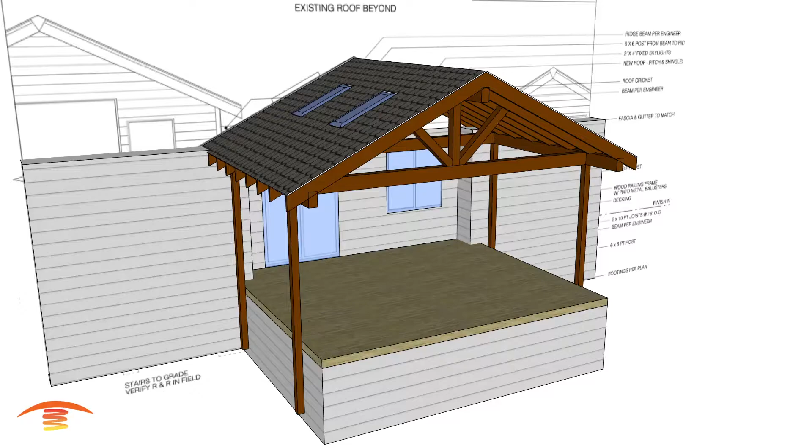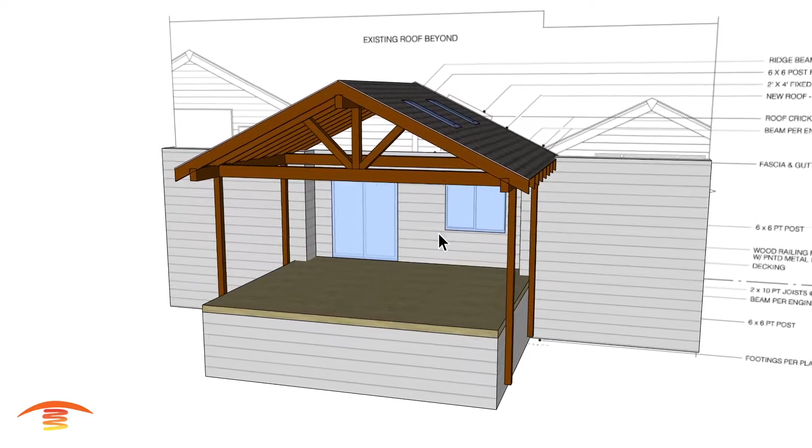Now let's get heating. Alright, here's a residential application. You can see it's a structure outdoors here on a porch. We have a door here that slides open left and right, a window. And we do have a couple of beams here coming across, and I think that's about it.

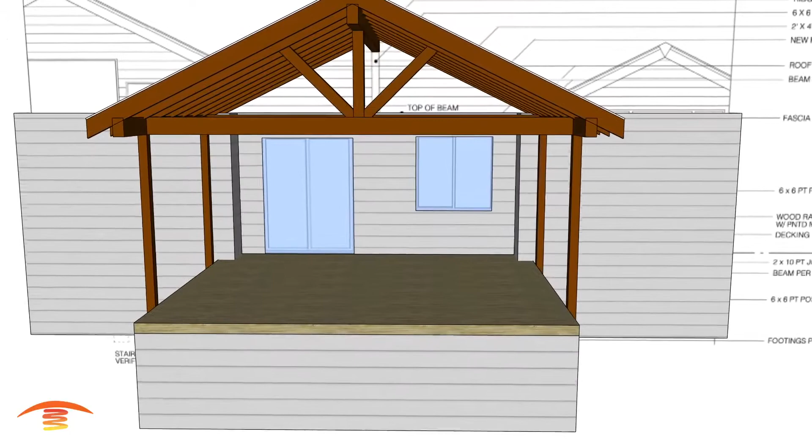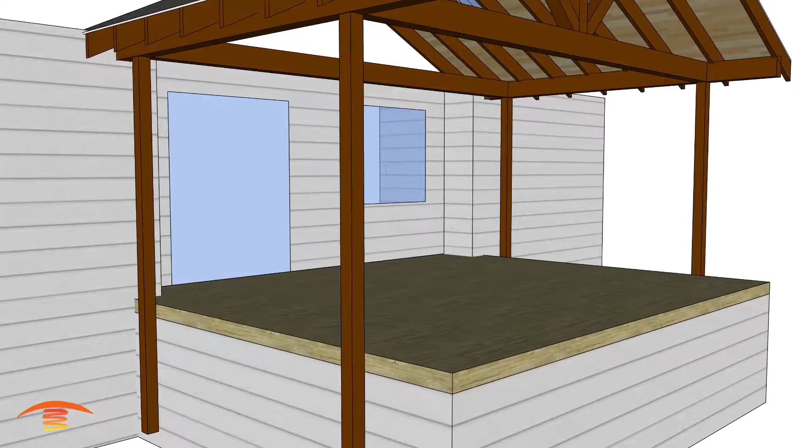You can see I received the floor plan as well as an elevation, and I think I also got a reflected ceiling plan. But in any case, that's all we have up here right now. I'm going to turn off the floor plan here, or the elevation. I didn't do the whole detail of the home here, but we're going to go ahead and just look at what we can do for this portion anyway. So let's go ahead and look at the overall dimensions.

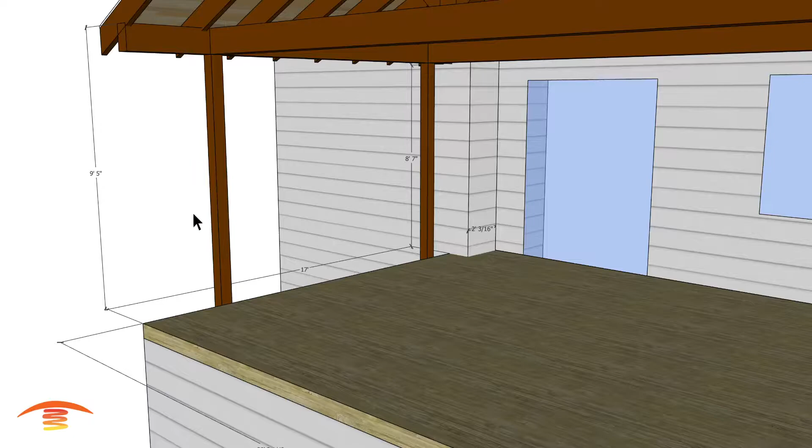Overall dimensions I have at 17 feet deep, I think. Actually, it goes a little bit further here. I think I had this at 2 more feet here. Sorry about that. Let me just pull that up real quick and check that out. We have another 2 feet. So we'll call it 19 feet deep by 20 feet and 2 inches wide, this outer portion here. And we have about 9'5" to the top of this beam up here, and then at the bottom I have it at 8'7".

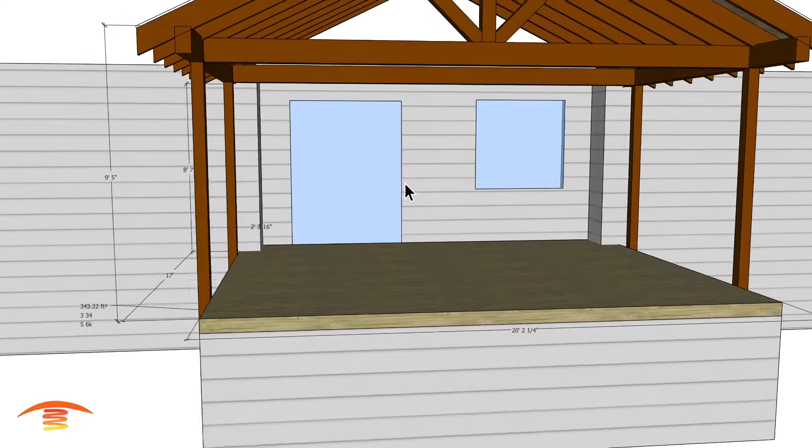Also, just to take a side note, here it shows that we have an overall space of about 343 square feet, and if you were to calculate this space out, and this is how I normally would do the first part of a plan, is to figure out how many units it really calls for. So if you were to plan out, I would get a BTU demand here, and it would come out to 3 heaters at an S34, so 34,000 BTUs, or 5 of a 6,000 watt electric heater. Those are 20,000 BTUs apiece.

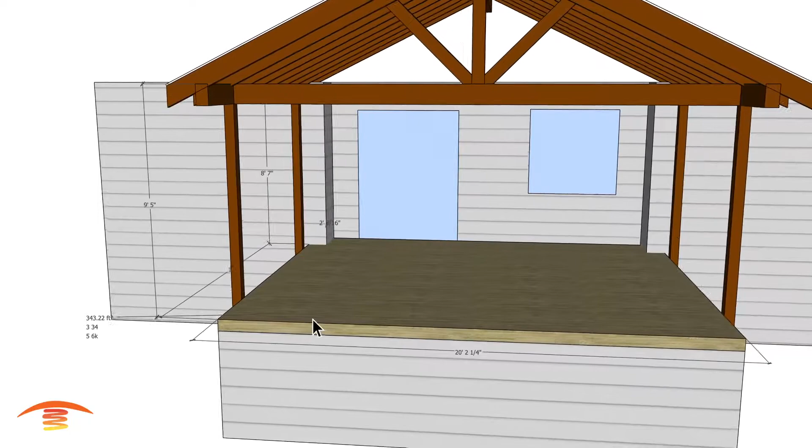Obviously, this space here, you couldn't put 5 Infratech electric heaters, but that just gives you a starting point to know kind of what to look forward to or look at as far as the application and what you might need. So just bear that in mind, and I'm going to go ahead and turn that off.

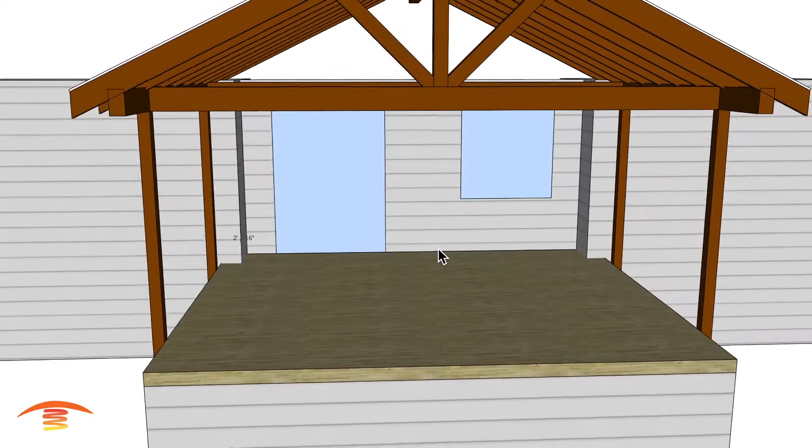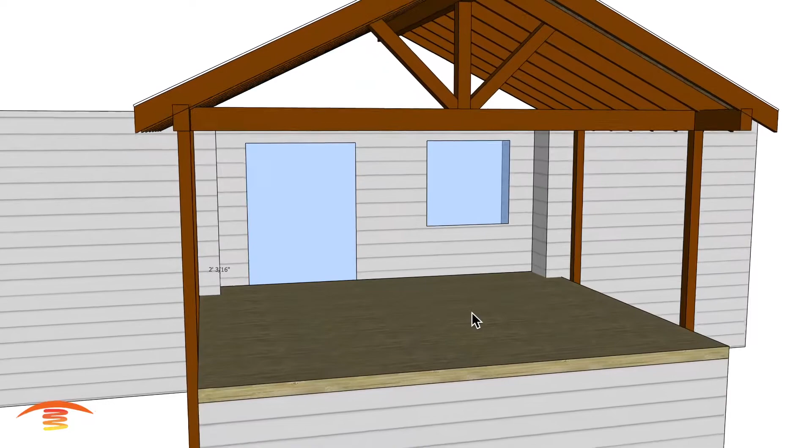Now, this property is in the northwest of the United States. I think it's really close to the Canadian border, and I think it probably gets really cool over here. So my goal would be to produce as much heat as I can and extend the season out as far as possible. I don't think that we're going to be able to make this application year-round. However, if you're acclimated to the temperatures, it might allow you to sit out there for the better part of the year. I'm not quite sure of that. That's an individual acceptance, I guess.

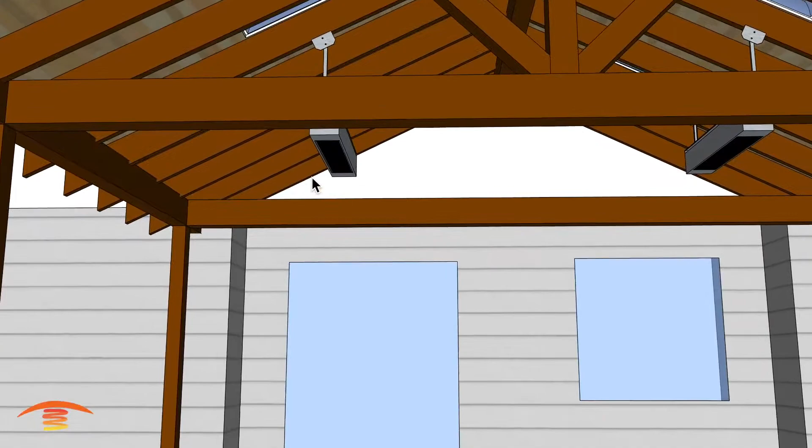So all right, let's go ahead and look at my preferred on a job like this. It would be to put some gas heaters here. These are Infrared Dynamics Sunpak. This could be either a S34 or a TSH. They do make a TSR. I don't recommend the TSRs. I like the TSHs because it just gives you more flexibility as far as turning them on and off, and if you just had a switch here, you don't lose a remote control, things of that nature. So I'm more keen into the hardwire than I am the handheld remotes.

You'll notice here that the beams I have coming down here, or rafters you might call them, don't line up with the brackets here, so that's something that we just have to kind of confirm. What I've done is I've placed the 2 heaters centrally in this space here, and went with that.

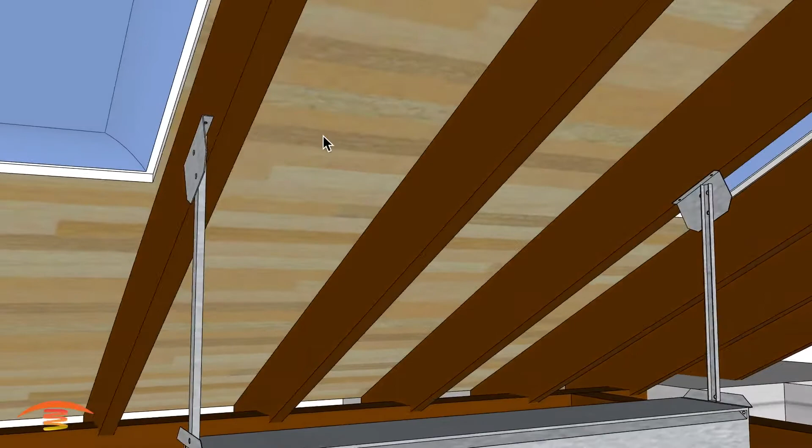So the heaters might have to be moved over, or maybe the rafters are moved over and I'm just wrong on that rafter position. I think I have them at 16-inch centers, and they're 2x8s, I believe I put up there. But in any case, you could mount the heater to the rafter like that, or you could put a block where you see that it's needed, here to here and here to here possibly. You might even put a block that goes across the whole area here and maybe sticks out another inch. I wouldn't really like to see that, but

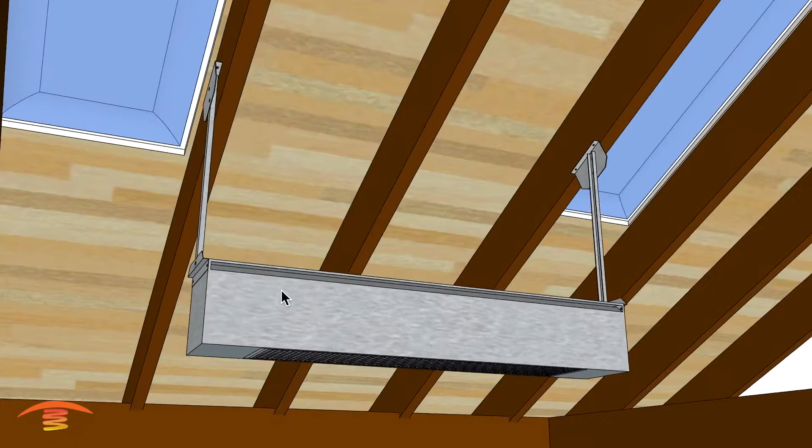I don't think that anyone would visually notice that the heaters are off center if you have them hooked up to the rafters properly. So these heaters are 4 feet long, so the brackets come out a little bit further than that 4 feet. I think it's 48 1/4 inch from this edge here to this edge over here, and that's where the alignment of the ceiling mount bracket, or even wall mount bracket for that matter, exists. So

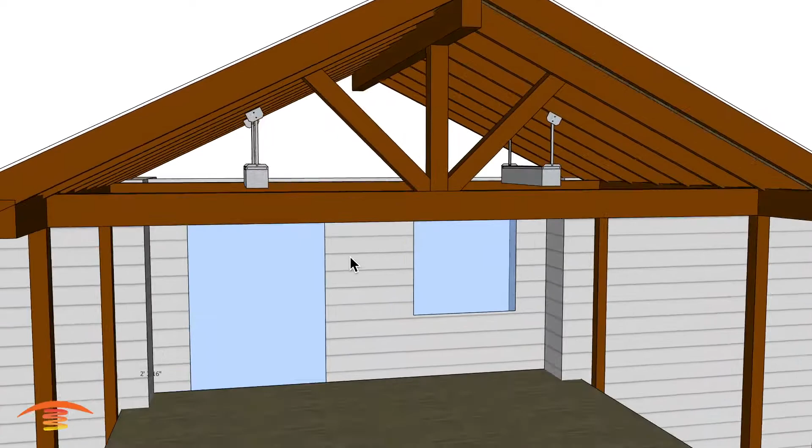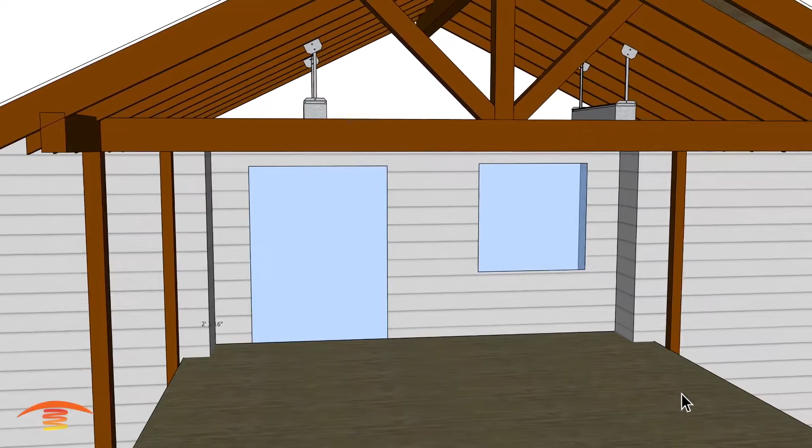What else? I think I have these at about 5.5 feet from this edge here. So let's go ahead and mark that off here real quick to this point. And yeah, we got 5 feet 3 1/8 inch. You can see there. And I'm going to just delete that for right now. And that would be the same over here, the center of the heater to this edge over here. All right. And I'm using the full length of the bracket, and that way I can get the heater down as far as possible. I really want the heater as close as possible because I want to produce as much heat as I can in the space down here.

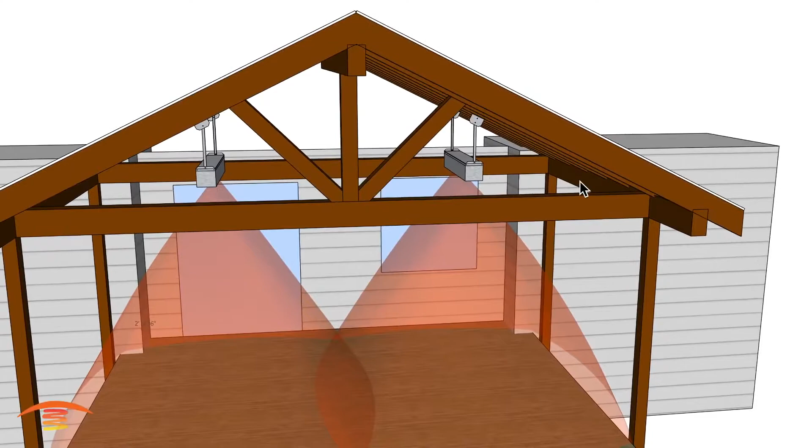All right, and that's why I like to put them in the center if possible. You could put it over here on the edge, but then the center won't get the proper coverage. You'll need a third heater and possibly still not have comfortable seating back here in the center back section. All right, so that would be the gas heater Sunpak, 2 units. I'm going to go ahead and turn that off, and we're going to go ahead and look at the electric heater option. Let's see where I have that.

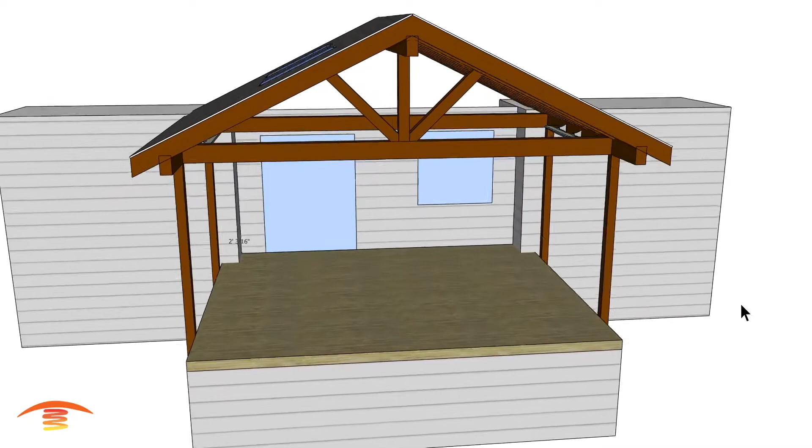Hold on 1 second. All right, so here we have the electric heater option. I'm sorry about that. I had a little issue with it coming up.

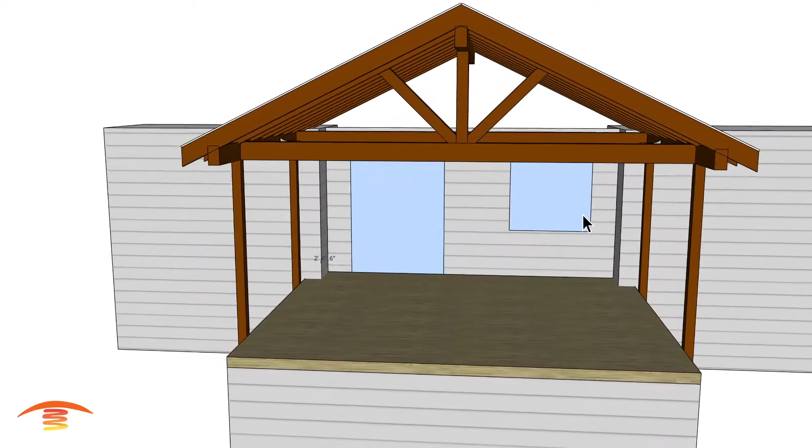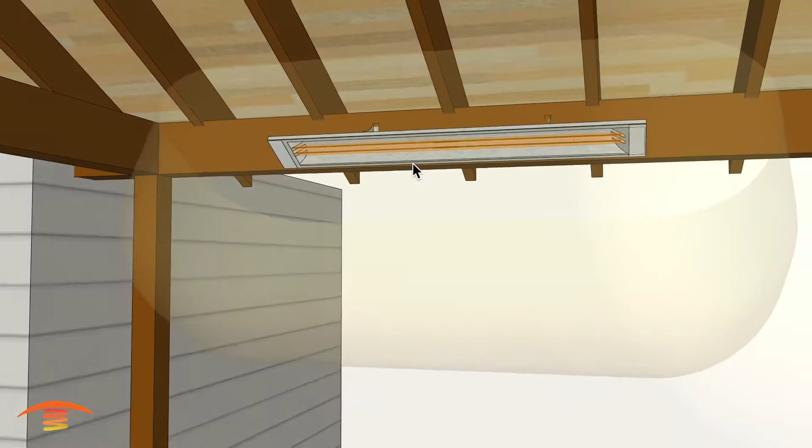The electric heater option, I have one 6,000 watt on this edge, one 6,000 watt on that edge, and then I have one on this front edge here. And so the 6,000 watt units are equivalent to about 20,500 BTUs, a little bit less than that. The Sunpaks were 34,000, so it is a lot hotter of a unit, and that's why earlier I mentioned that the square footage would actually call for more heat or more units in order to give it the proper amount of BTUs per square foot. But in any case, let's go ahead and look at the clearances on here. We have a clearance behind the heater, or sorry, rather it's actually in front of the heater.

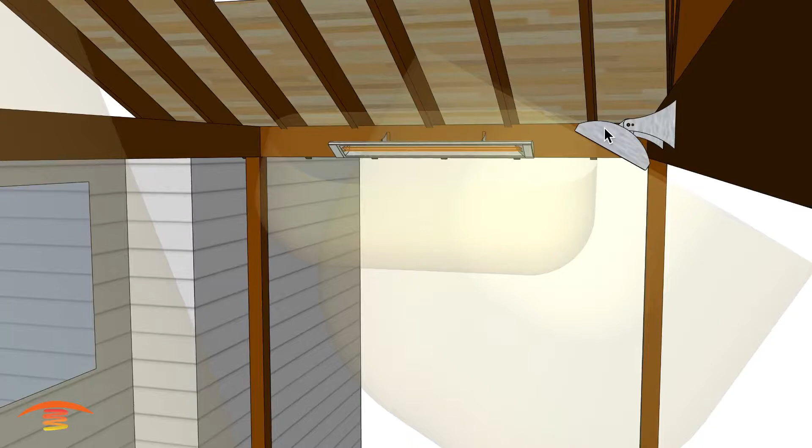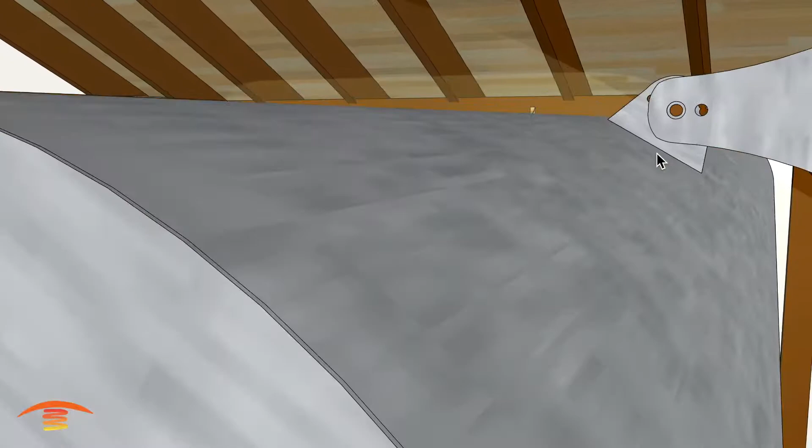I'll look at this one over here. It'll show a little bit better, I think. So we have at this point here 18 inches out, 36 inches down and around, and then 18 inches out from this edge here. If you look at Infratech's brackets and the way that they show the angles, if you were to come straight off of here 60 degrees down, that's the angle that I'm using. You can see that lines up with the 60-degree hole that they have there.

If you went any further than the 60 degrees, you would have to, number one, make sure you have clearances back here. You'd probably have to bring a longer bracket out, but also drill your own hole in that bracket in order to make it lock in place for yourself. So that's the lower clearances here, and you can see that there's no issue with any one of those.

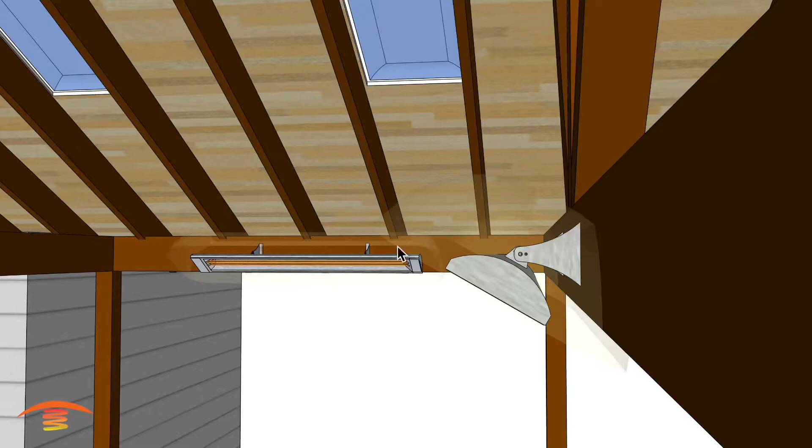And then if you look at the above clearance here, if you look at their brochure, their information and mounting options, you can go to that 60 degrees on a wall with the OEM supplied bracket in the kit. So you do not need to go with a longer bracket, but this would be the clearance around the heater itself, and you're meeting all the clearances and the recommendations of the manufacturer with their 60-degree tilt.

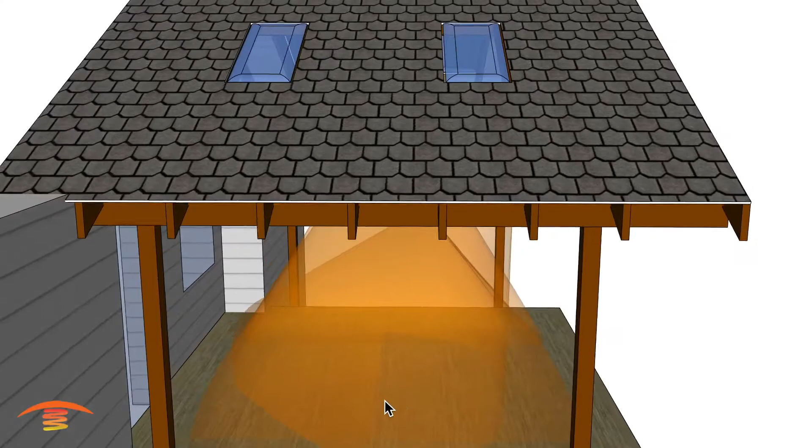All right, so let's go ahead and look at the footprint of heat. You can see here I'm really concentrating all this heat in the center of the patio area, and you can see how this heater here doesn't really reach out to this point. This would be the furthest throw that you can get out of a 6,000 watt unit and still feel the heat. You got another ray coming over here, so it makes it a little bit more acceptable. And obviously we have this third ray coming over here, so the back section will be warm.

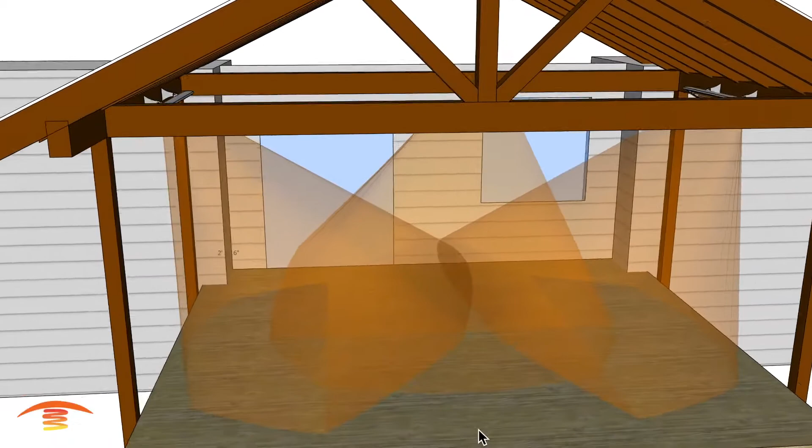Here you can see the same issue. We're not really heating up the whole entire space efficiently. We are going with that 30-degree tilt. If you go with any further of a tilt to point it down further to the ground, you got to go with a longer bracket again and make your own hole to make that work out properly. They do have a 6-inch longer bracket, which would give you the full 6 inches all the way around the heater. So just to show you an image of that.

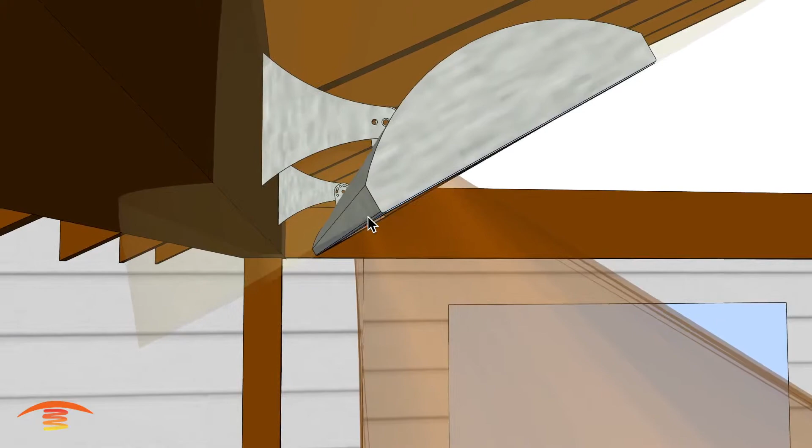So you can see this is the 6 inches of clearance that we need to meet all the way around, but you'd also have to make sure you're meeting the 18 inches of clearance down below here. So it would have to be level with this if you were going to go straight down, but obviously you wouldn't want to on this application. All right, so that's the clearances that we're meeting there. Go ahead and turn those off.

And again, you can see that we're getting a nice, decent coverage throughout the space. We're not hitting this edge here. We're missing this edge, and that edge, and that's probably why it calls out for the 5 units, as we stated earlier today. All right, I hope this has helped.